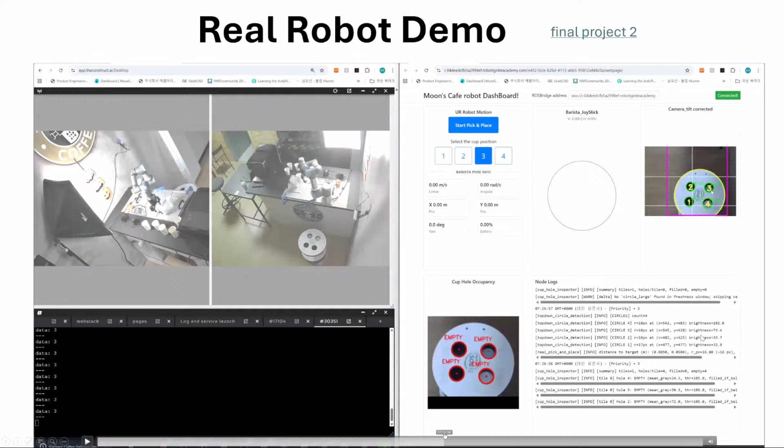This is the real robot simulation that I recorded in case system errors happen. You can see the robot picking up something and placing it into the target position.

Now I can do the real demo if the lab is ready.

Alberto, is the lab ready? Yes, should be ready. All right, so...

Hold on a second. What's wrong with my screen? What's wrong with my screen here? Okay, can we see it properly now? Yeah, okay, so there was some issue, okay, here.

Okay, so I need to start from the camera first. I'll start the camera. Every time I have to start this camera. Let me put this.

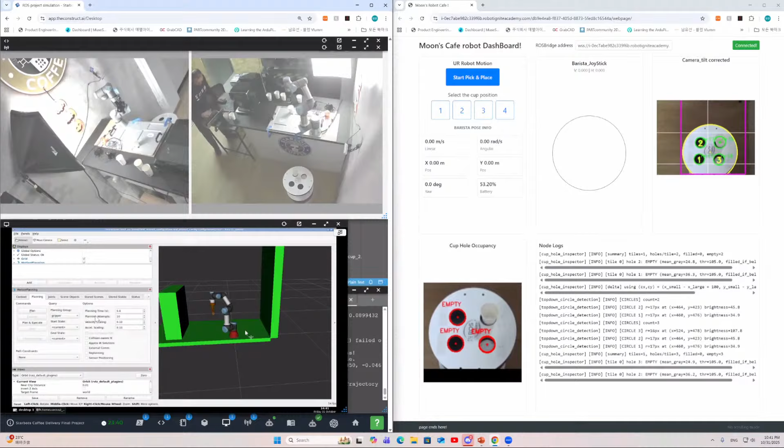Wait, not yet, not yet. We have to see the gripper opening and so on, which indicates that the restart has been made, because through the bring-up process, the gripper opens automatically. So we have to see that.

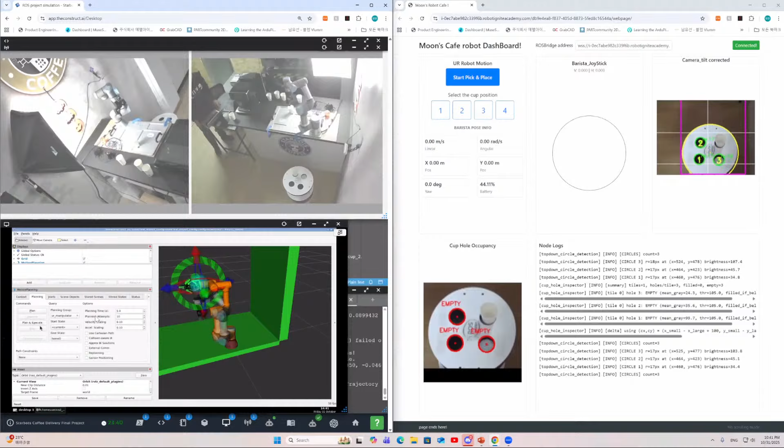Yeah, we can see there, you can see that the gripper is opening. Can I test from my RViz first? Sure, you can try a movement. Let me try from my RViz.

So I'm going to move to the home position from here. Okay, it's moving now. Nice, okay, so I will launch from the script first to check whether it is working or not. All right, it's moving now.

So the first cup can be controlled by the script, but I will use the UI for the next cup. Right now, without any selection, the default is number one. So he will put the cup in the number one position here, in the bottom right of the video screen.

Is it correct? It looks like it lagged a little bit. Yeah, there's a lag. The camera just lagged a little bit.

Now the two cup is filled, so let me select maybe number two. Number two is the top right from the video feed. Okay, now I select number two.

Let's ask Ricardo if he can put another cup also, he's doing that right now. And then I start the pick and place motion by UI. All right, it's moving now.

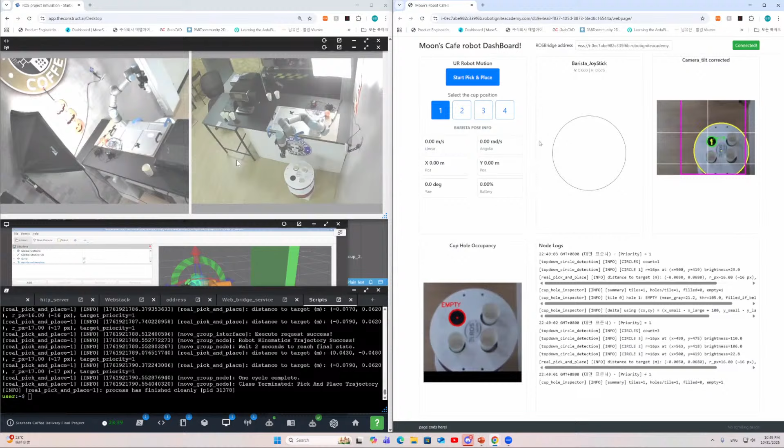It seems like okay, now it can pick it. Right, you can reach now. Okay, yeah, now we can reach.

So in summary, the robot is able to pick up the cup from the fixed location and place it at the target positions. The perception algorithm is able to detect the cup hole positions and also judge the occupancy, whether it's filled or not. And the web GUI can communicate to our system very well. That is my conclusion.

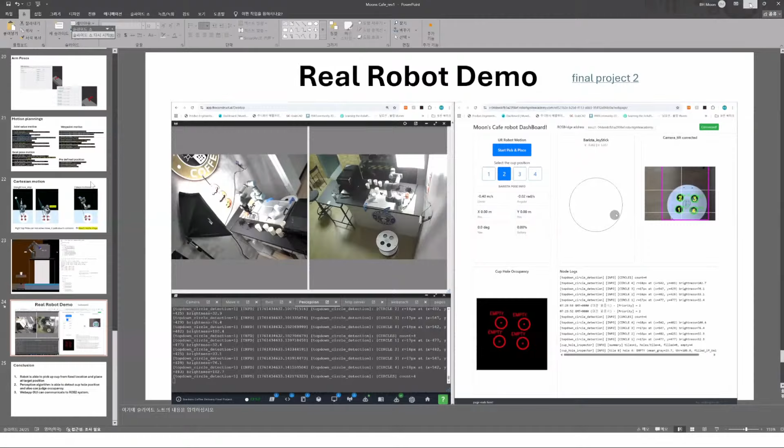Thanks a lot for the presentation, it's been very interesting and very educative. Especially the presentation part was very well structured, so it was very easy to understand everything properly. So then let's go with a bit of Q&A.

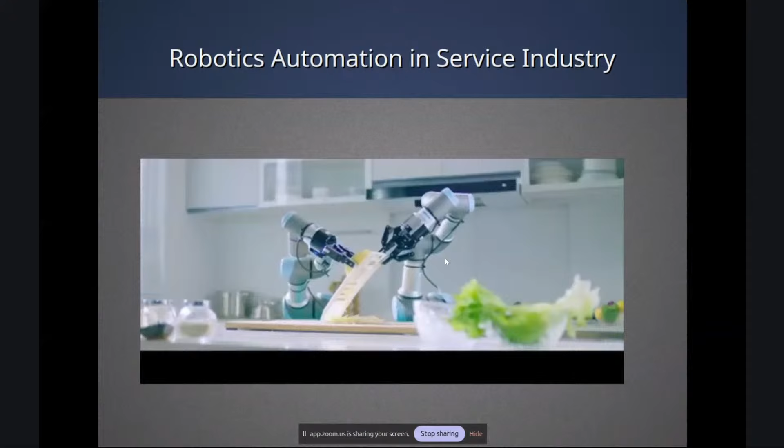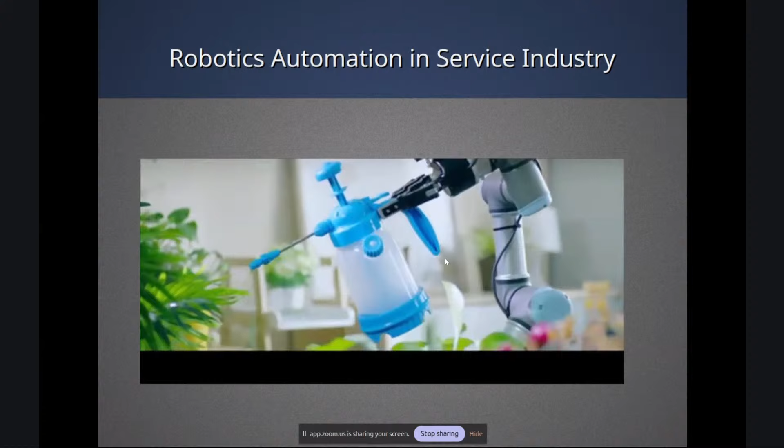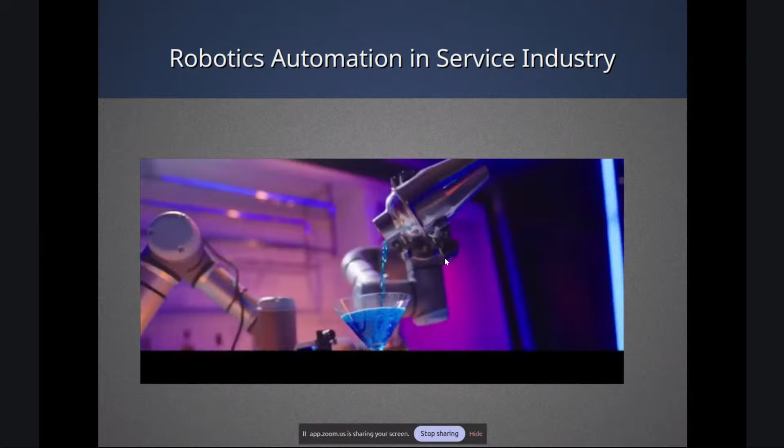Robotics automation is transforming the service industry, bringing efficiency to everyday tasks, from self-service robots in fast food restaurants to robotic janitors in hotels. Robots are enhancing customer experience while reducing operational costs. We see more intelligent systems every day taking on repetitive or labor-intensive roles.

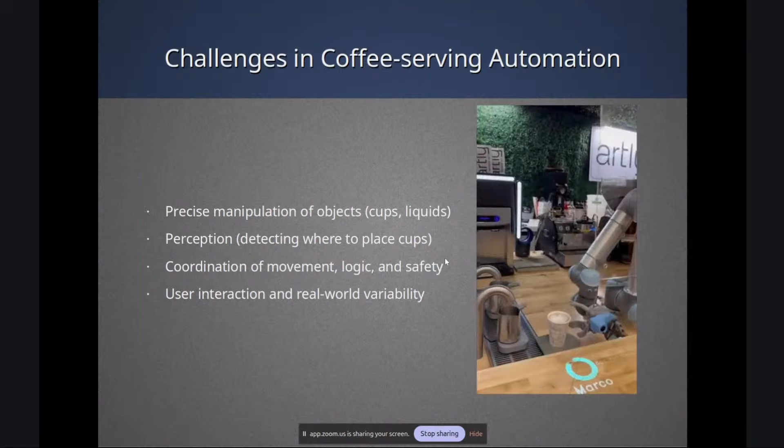One example is coffee service, like our project. The idea may seem simple, but coffee serving involves several challenges, such as handling cups, pouring liquids, and managing different tools with high precision. The robot must accurately detect where to place or pick the cups, recognize objects, and sometimes identify human gesture positions in real time. The robot needs to follow logical steps, coordinate multiple actions in sequence, and do that in safe motion.

This project focuses on robotic automation of handling cups between a stationary counter and a delivery robot. The manipulation is done using the UR3E 6 degree of freedom robot arm. The system uses vision as guidance, using data from the 415 depth camera.

The delivery robot must position itself within view of the camera and within reachable distance to the arm, one of the limitations. It shouldn't be too far or too close to the coffee counter. The cup to be picked is detected in simulation, but in the real lab there is no camera such that, so it is a hard-coded value. The cup should be ensured to stay upright during manipulation so it doesn't spill.

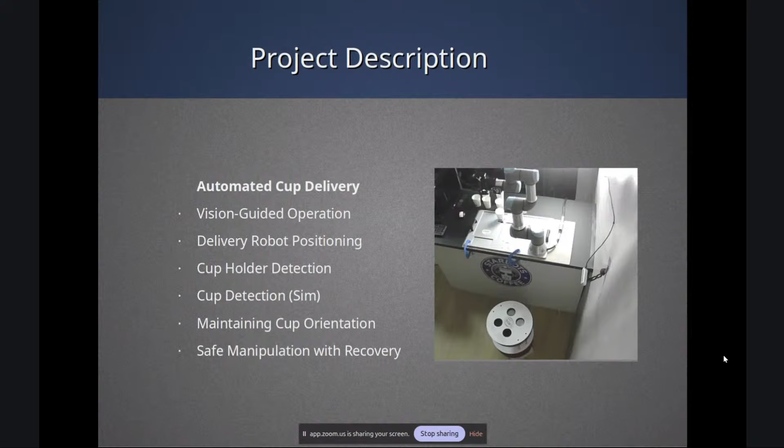I decided to add such inclusion because in industry, in real applications, usually the robot arm is within an enclosed space and does manipulation without any obstruction. But in our case, it reaches outside of its safe area, the coffee counter. So I thought this was a good opportunity to test and utilize behavior trees. I will be explaining that later.

The backbone of the project, the manipulation, is done using the MoveIt C++ API. MoveIt is widely used for tasks involving arm movement, grasping, and doing it with collision avoidance. I utilized MoveIt for kinematic modeling of the robot structure with the MoveGroup interface. It has a useful tool, MoveIt Setup Assistant. It's simple and intuitive to use with little knowledge, and there are tutorials as well.

For planning, I use selected OMPL planners for generating smooth, collision-free trajectories, with constraints-based planning to ensure the robot moves within defined limits, like an orientation limit to make the cup move upright, and avoid collisions using camera data, which I will explain. Finally, executing plans with the inverse kinematic planner plugin.

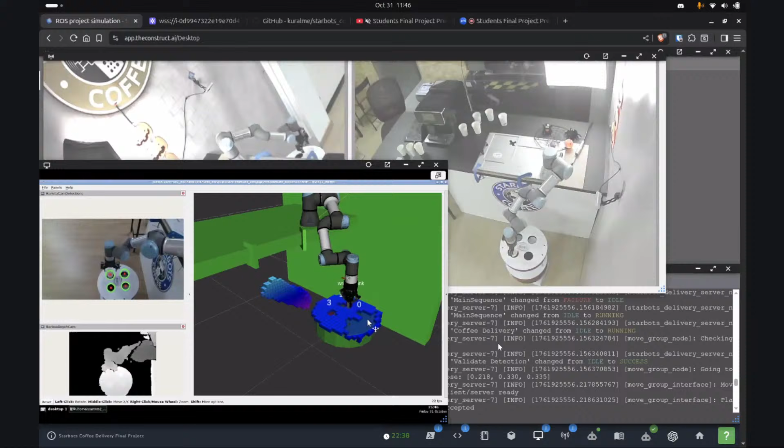It moves to just above the goal. Okay, so let's see if we can have someone put another cup there. Yeah, in the X mark.

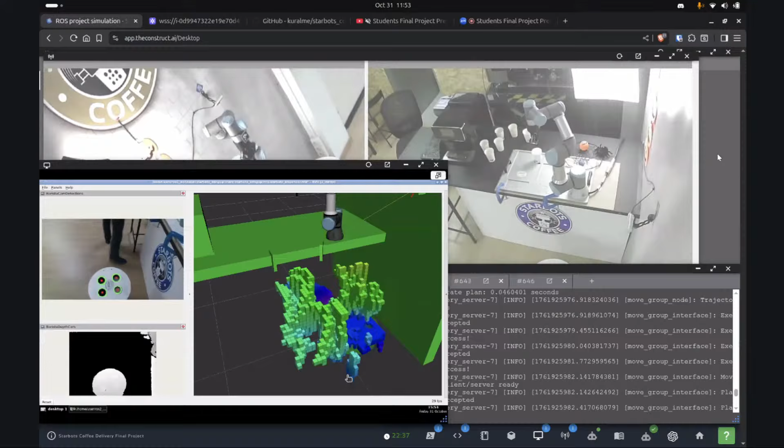Okay, yeah, that's the fallback mechanism activated there. Okay, so it's not needed. But this is concerning, Octomap didn't clear it here. Can you see the screen? Yes, I will start again.

Yeah, so let's try to do a test again for the fallback, okay? And then, yeah, so we will, because we have like 5 minutes left. All right, let's try that.

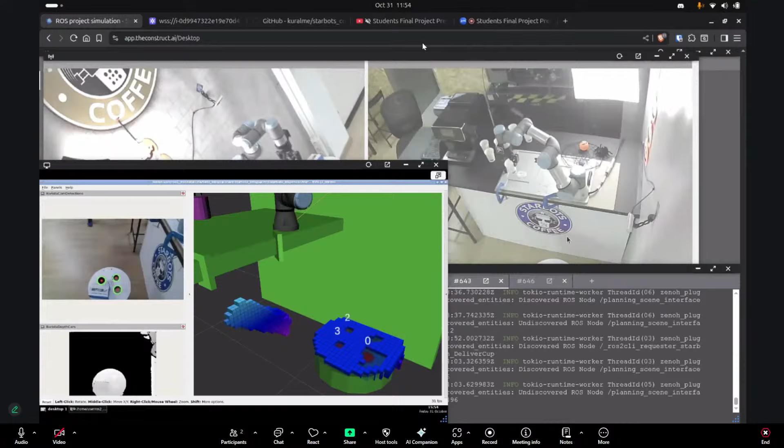So, yeah, now it's going for the cup, and now it should be a good moment to block it, right? For example, for number 3. Let's see if Ricardo can block the correct one, or...

No, okay, that was the other one. What would happen? It would try to plan a motion. When it fails, it should go back to the original.

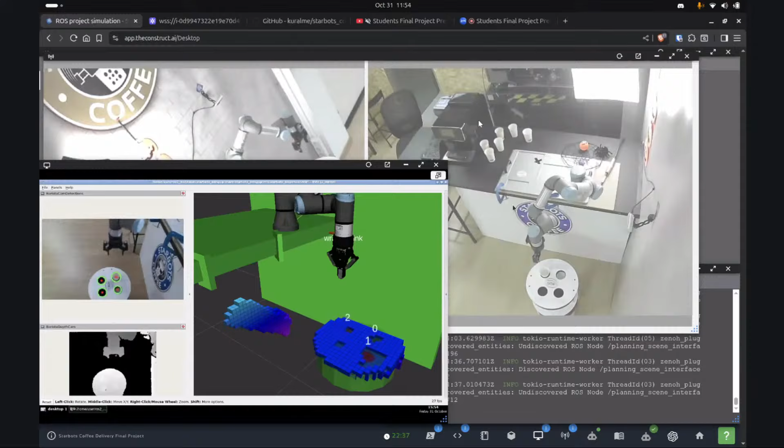I can showcase in simulation if we have the time. How much do we have? Yeah, so I think we have to finish it here, because already... All right, mm-hmm, all right then. Okay.

Oh, my session ended anyway. Yeah, that's why also, because the real lab session is going to end. So yeah, I will wrap up.

So one of the challenges of the project was determining the transform between the camera link and the robot. We need to publish that statically. So a rigid camera with a known distance would speed up this project a lot.

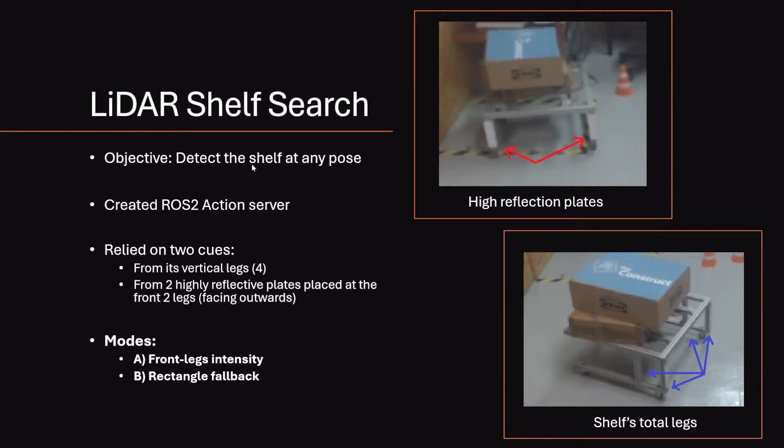It runs in 2 modes: A, an intensity-driven front leg pairing, and B, a geometry fallback that finds the 2 parallel pairs in an orthogonal offset between the front and back legs. When the detection is stable, it publishes a cart goal and 2 standoff frames on each side of the shelf.

This figure shows how the position of each leg was calculated with basic trigonometry using information from the laser scan topics such as the range, angle, and intensity of each emitted ray. This search type was used to find the shelf's position and orientation in the case where the robot was facing the front of the shelf.

For the second search type, where the robot could no longer see the front highly reflective plates of the shelf, I used all of the information possible to detect the shelf, which was all of its 4 legs. Using similar calculations, I was able to detect the shelf from its sides and its back.

After successful detection, a total of 3 transformation frames are published to approach the shelf. To keep detections clean, I applied 4 simple filters. First, each leg needs to support at least 2 points in a small clustering radius.

Second, for the front legs, I used an adaptive intensity threshold. Third, I gate the geometry for the front leg separation and the back-to-front offset distance to be in their expected range. And finally, I require 2 consecutive stable frames within a tolerance of 5 centimeters.

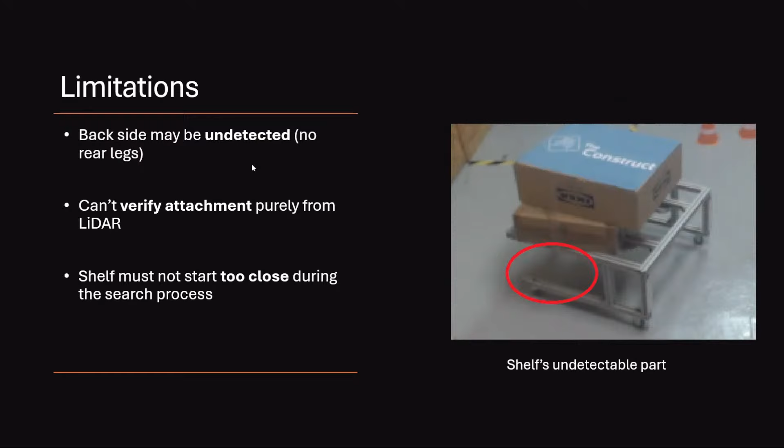Some of the limitations of this project were that no matter what I did, I could never detect the back side of the shelf because there were no vertical legs on its rear side. So the robot could crash during attaching or generally during navigation around the back side of the shelf. Also, I could never verify if the attaching process was successful using the LiDAR sensor because its field of view is only 270 degrees.

So to summarize, the behavior flow for the whole task is to initially perform the search process to find the shelf.

After successfully detecting the shelf, the robot publishes and navigates to the nearest shelf standoff frame and executes the final approach using the navigation stack. Once the robot is underneath the shelf, it raises its elevator to attach to the shelf and changes its footprint to match the dimensions of the shelf. Finally, the robot moves to a selected goal, releases the shelf, and navigates to its home position.

To manage the entire operation, I developed a web-based interface that allows me to start the localization and navigation servers and run the processes needed to complete a full task either automatically or step by step.

What I will further improve in this project is to have a bit more time to adjust the navigation and detection parameters for the robot to perform a more reliable task completion.

So Alberto, my presentation is now finished, and I will now proceed to show you a live demonstration for the real robot performing the full task operation. So let me share my screen again.

Okay. Wait a minute. Can you see my screen? Yeah, okay. Okay, so now connect to the robot. Let's wait a little bit. So I am connected. Let me check something first. All right.